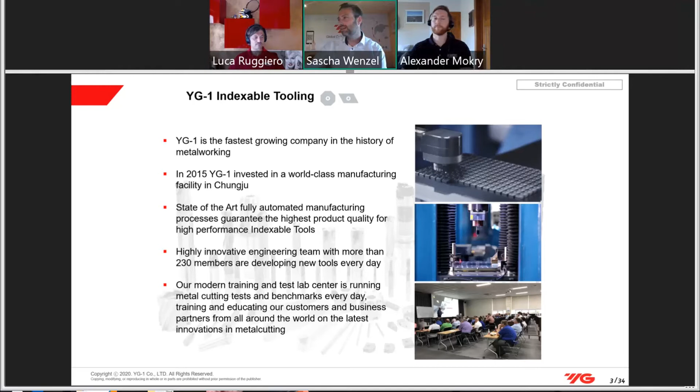YG1 is the fastest growing company in metalworking history, meaning we grow very, very fast every year. A very interesting fact is that we built a world-class manufacturing facility for indexable inserts in 2015, and we have a development team of more than 230 members, plus training labs all over the world, in Germany especially in Oberkochen, and also in Russia, Italy, and other places.

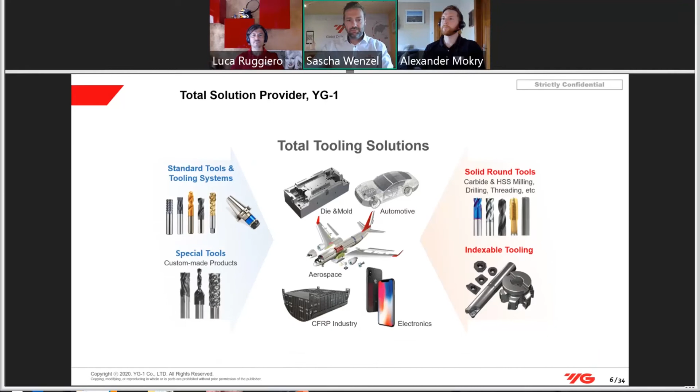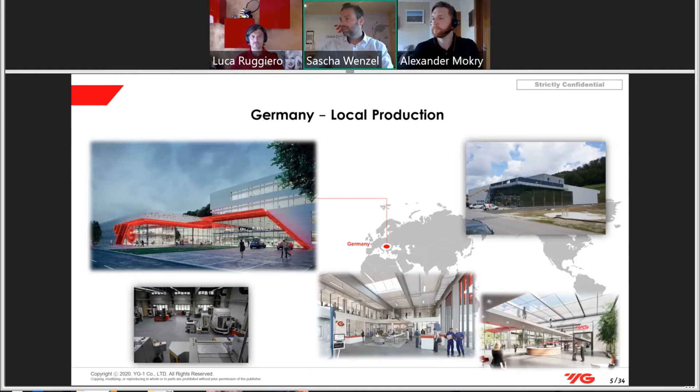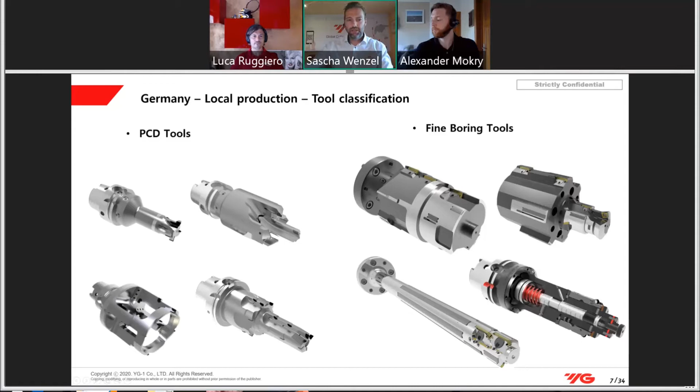The partnership. We have a very, very strong partnership between ESPRIT and YG1. We have a strong history. Both companies are known for innovative and unique solutions on the market. We always provide you the newest technology, and as a team, we are able to give you the whole package and close the gaps between the machine, the tools, and the software.

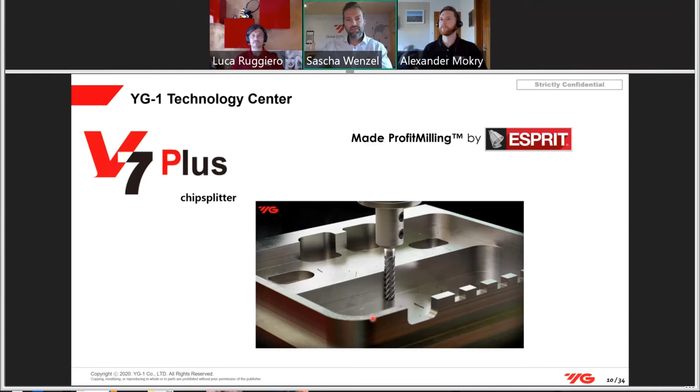Here's a small product overview. It's our V7 chip splitter. It's made even for ProfitMilling. That means trochoidal milling. Here you can see we are working with different materials like titanium, steel, stainless steel, and some cast iron.

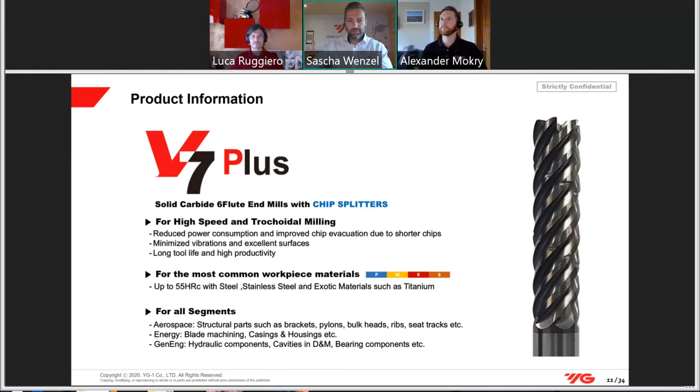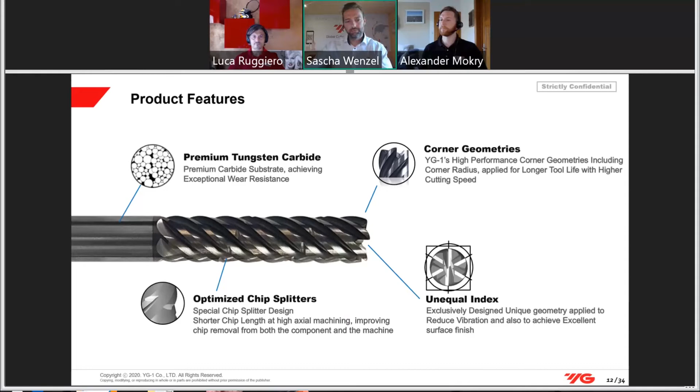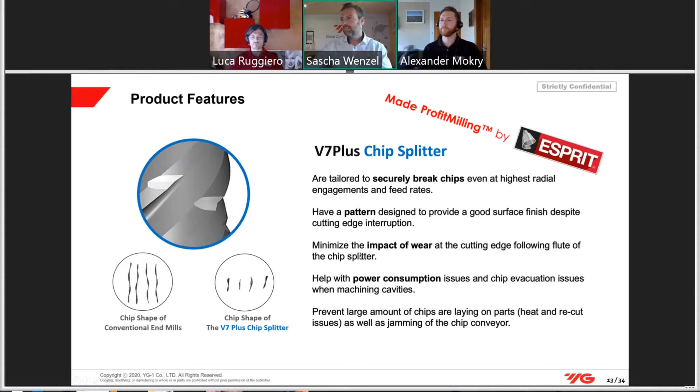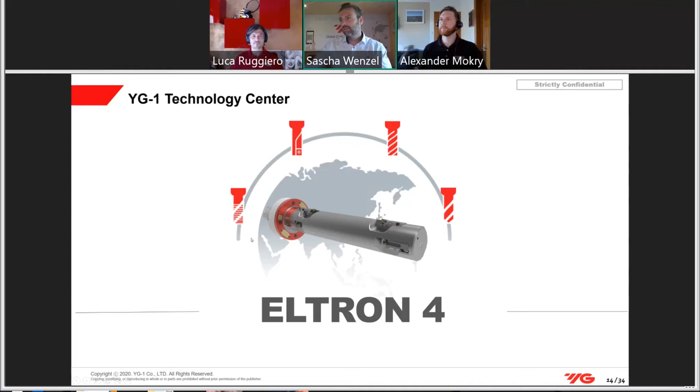I'm now presenting some very, very nice tools. This tool is very unique on the market. It's a totally electronic boring bar, which you can control even via ESPRIT on the laptop, CAM software, or with this small remote control. It's used in the automotive industry; especially we have a project together with BMW.

Here you can see on the right side of this tool, in the red, there are some batteries inside, and everything is controlled via Bluetooth over the software. You can measure in process, and you can adjust this fine boring bar in the process so that you get less scrap and always have the right tolerance for your products.

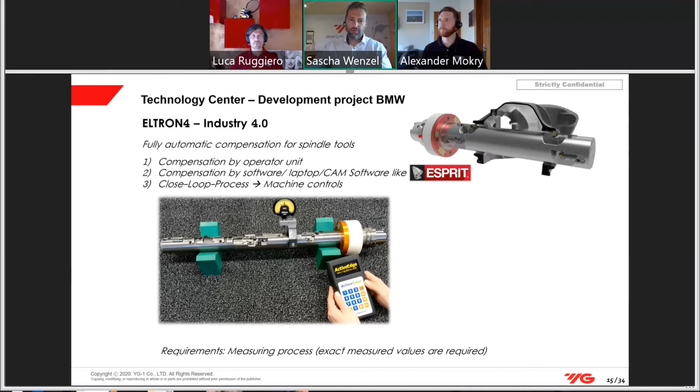How it works: you have a remote control. The remote control gives a signal to this boring bar. Here you can see the cassette, and the cassette is a little electrical engine. The accuracy of this product is 0.001 millimeter. It's very, very fine, and the setting travel is 0.3 millimeters.

And how we come together with ESPRIT: we have an interface where we can go directly from the machine into the process, and you can do this via ESPRIT. That means you make an NC event and program, and then the cassette goes out and does this part, and especially finishes this part.

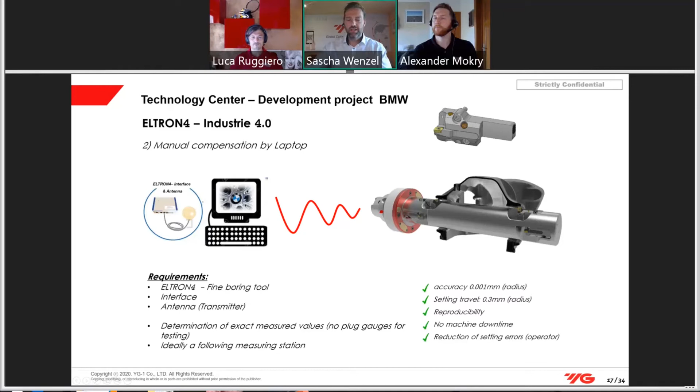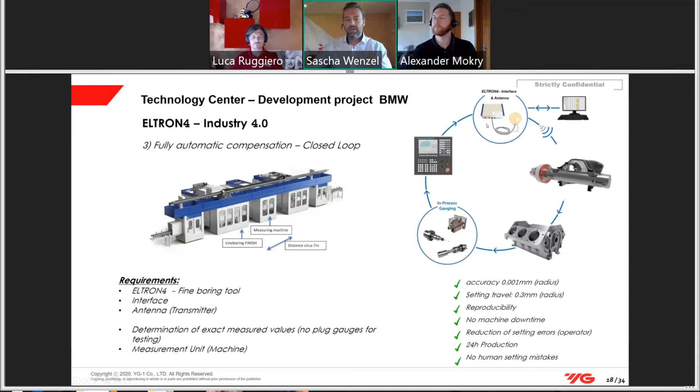The processes look like this. You have a process of machines. You have more machines. You measure your part, and then you give it to the gauging process. You give it to the control, and the control gives it back to the PC, to the process.

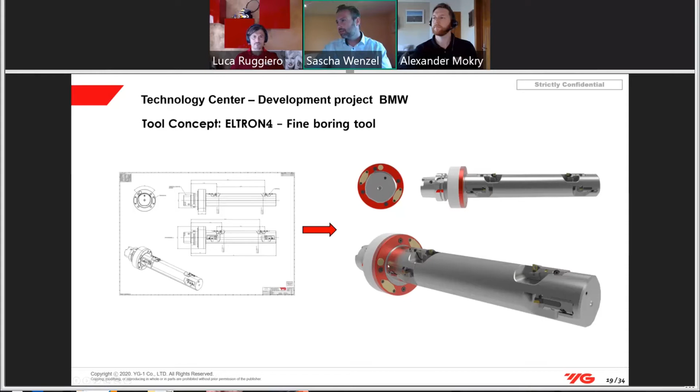Now you can see the small boring bar here. It's in a bigger view. These are our drawings for the customers. Yes. And here you can see the measuring unit with a closed loop directly to the process.

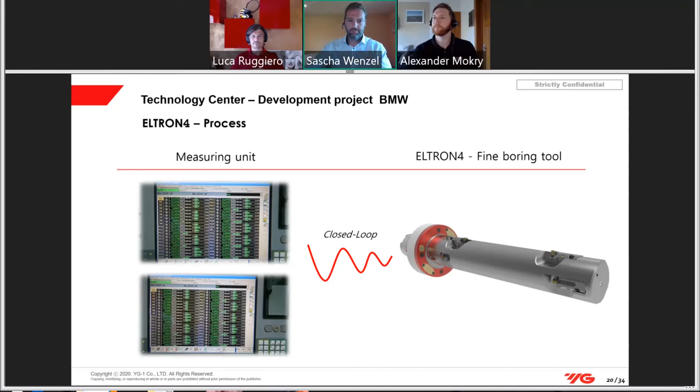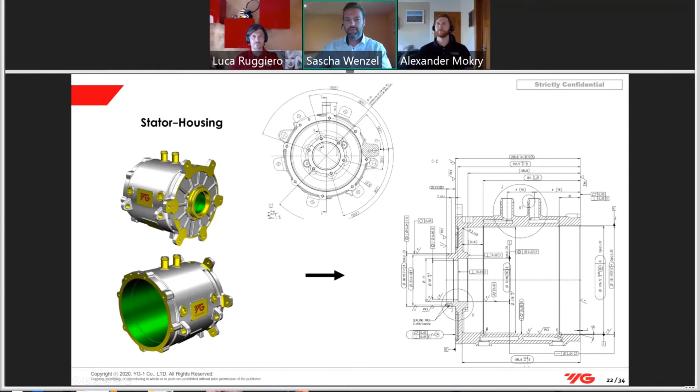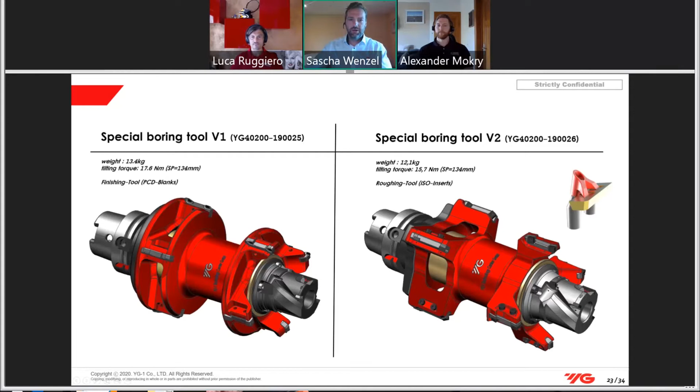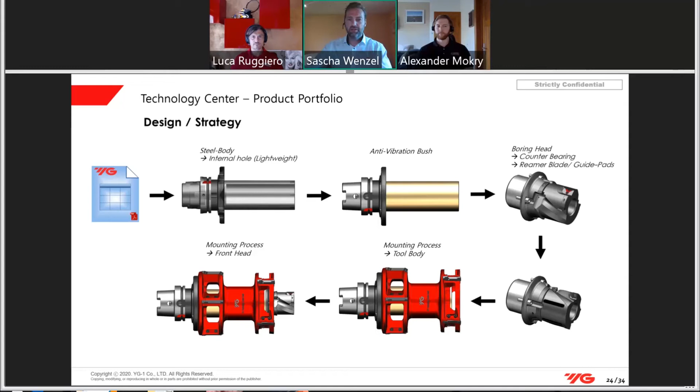These are two applications for roughing, and this tool is modular, and it's made of aluminium and even of steel. And the benefit, why we are so high technology, is that we are using a steel body, and we put an anti-vibration bush on it. That means we have less vibration in the process, because the hole that you have to manufacture is very, very big, and you have to look for your surface quality and for less vibration.

This is a special holding for indexable inserts. It looks like a V, like YG. It's a two-point placed indexable insert. Normally on the market, it's just one holding. We have two holdings with 10 degrees to get more precision for the finishing.

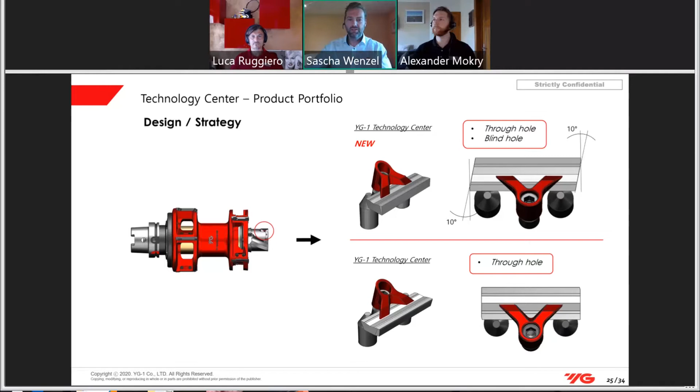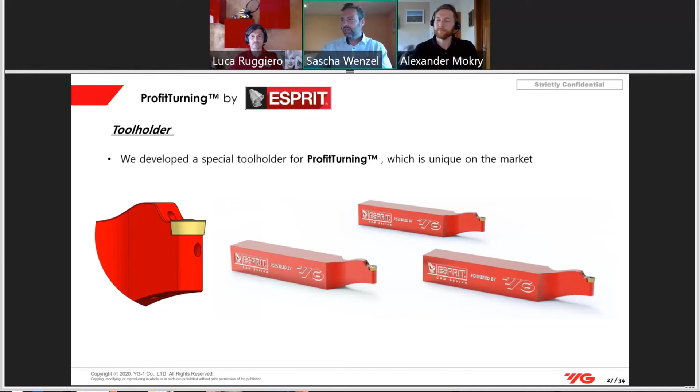Let's talk about profit turning. This is the reason why we're sitting together and working together, strongly together with ESPRIT. Here you can see a small holder program, especially made for profit turning with internal coolant. Sorry, it was too fast. Special made for profit turning. We have internal coolant from the internal and even to the external cutting edges, so that we can provide you a high cutting speed and a high feed rate to get less costs.

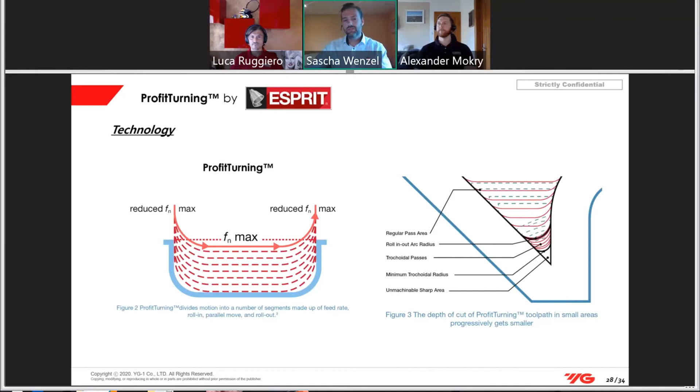Let's talk a little bit about the technology, profit turning. Profit turning is very impressive, because we are always working with radius, with the engagement radius, but Alexander will tell you more. Then you can see on the right side the radius of the trochoidal passes area and the regular passes area. So it's working very, very smooth. You always have a big chip control, which is a big benefit of this profit turning cycle from ESPRIT. And as you can see, the tool life could be 3 times more. You have less cost on your parts and less cost on your tools.

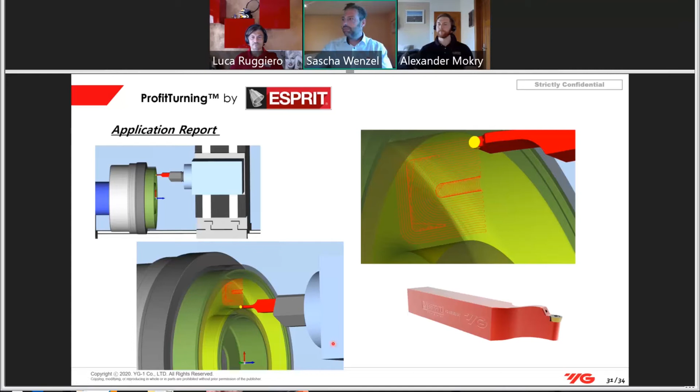Here is an application report. We're working with a cutting data of 400 meters. It could be a brake disc or something else. As you can see here, we have trochoidal passes always here. We have the engagement, which has come inside together with our tool holding.

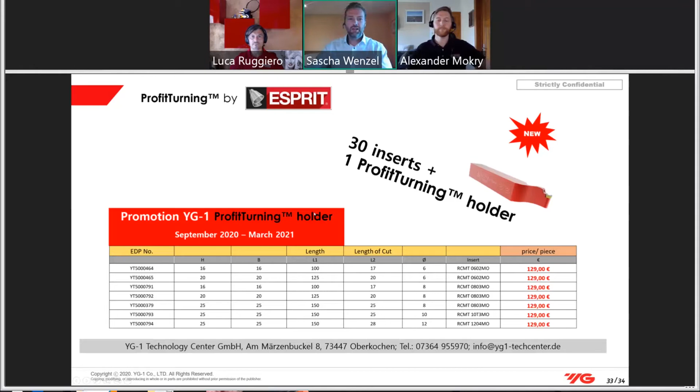Yeah, that was from my side. I will give the word to Alexander, who is showing us the ProfitTurning cycle in ESPRIT. That's right, Sascha. Thank you for your introduction. I'll try to share my screen. Sure. So can you see my correct screen now? Now we can see. Presentation. Yes, we can see it.

Okay, thank you. So Sascha already talked a lot about this new tool, as we can see it here in the picture. It's a new partnership that has come into place with ESPRIT and YG-1. Today we will be looking especially at this tool and how to program it within ESPRIT. What are the benefits for you as our customers, and how are the proper processes for this tool applied within ESPRIT? We call it ProfitTurning cycles. We will have a look at it later. Sascha already mentioned a bit of it, and we will dive a little deeper into the technical part of these kinds of tool paths and strategies.

Okay, the agenda from my side today will be YG-1 and ESPRIT as a first, quick point, and then we will have a look at the technical part. After that, we will swap to a live presentation within the ESPRIT interface, and then a questions and answers round.

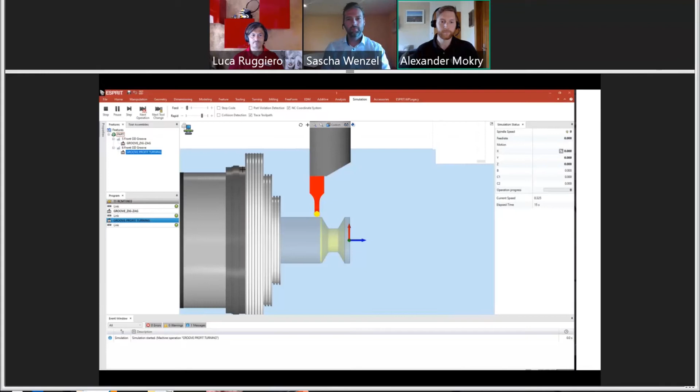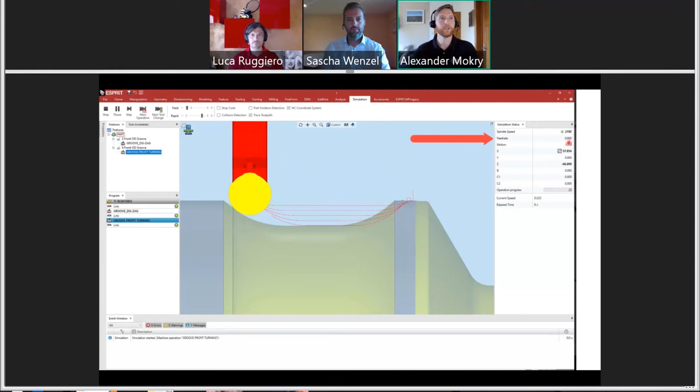Okay, ProfitTurning, a little technical overview. How do the tool paths work, and what benefits do you have by applying them? For this, we watch a short video first. In this video, we will have a closer look at this tool path. You can see it's alternating its directions, but doing it smoothly. And furthermore, it's not only alternating directions, but also changing the feed rate when entering the cut. So wherever the highest load is usually expected, the highest forces, we are reducing the feed rate. The customer can control by what amount it is reduced.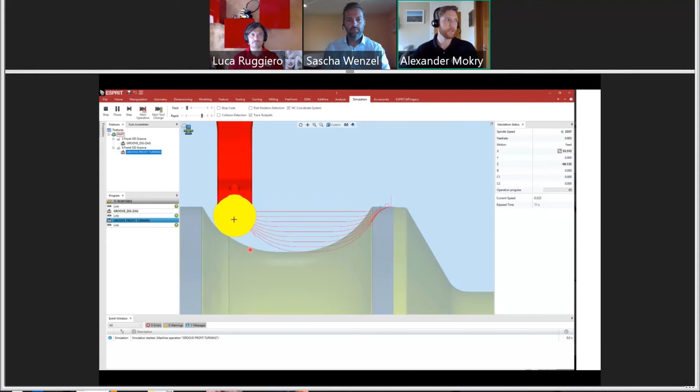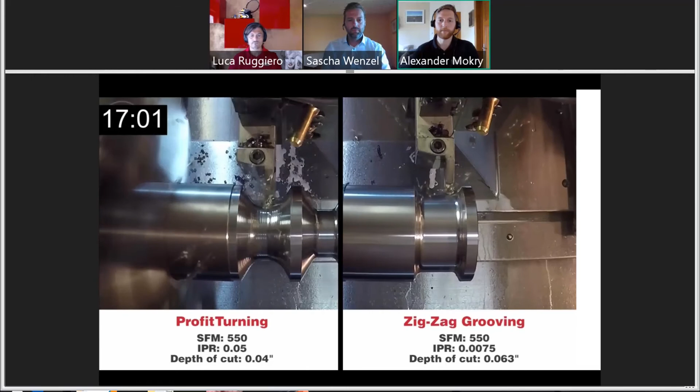This smooth rolling in and out and these reduced forces are what extend the tool life dramatically. There's a lot of mathematics behind these processes. They can be altered to your needs and are very versatile. So this part we just saw in the simulation is now the real cutting situation. On the left side, we see the profit turning compared to a conventional process of zigzag grooving. So it's a massive time reduction and a very efficient process. Very good for the tool life.

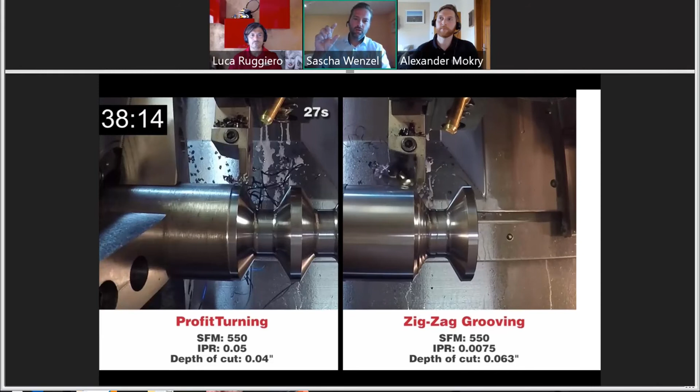And Alex, what you can see is that you always have the chip control, like you say, with a small radius. You can use the whole indexable insert, and because of the chip splitter geometry on this indexable insert, you will always have some chip control. You see on the right side there's less chip control. On the left side, there's always chip control. That means you won't have any problems with spinning chips and so on.

That's absolutely right. Yeah, Sascha, especially on hard material and material that tends to cause problems with chip breaking, these kinds of processes and tools are very, very beneficial. Of course, YG1 offers other tooling as well for other applications where we can use profit turning. We will show this on the next pictures.

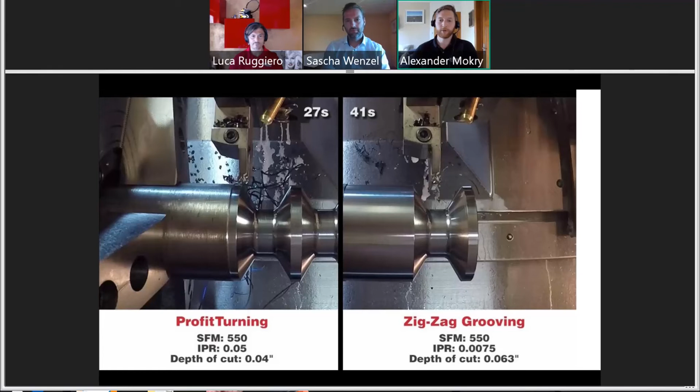So these are some typical applications. High advantages come usually where we have trouble, where the tools tend to vibrate on conventional approaches, where we have, for example, like we see here, these deep grooving passes, where we have tricky to reach areas for machining.

This is being approached with very high feed rates, but small cut depths, so depth of cut. So the forces are dramatically reduced with the smooth rolling in and out. The chips break properly, even in tough areas, and the material removal rate is increased overall. So it's only advantages to use these kind of strategies.

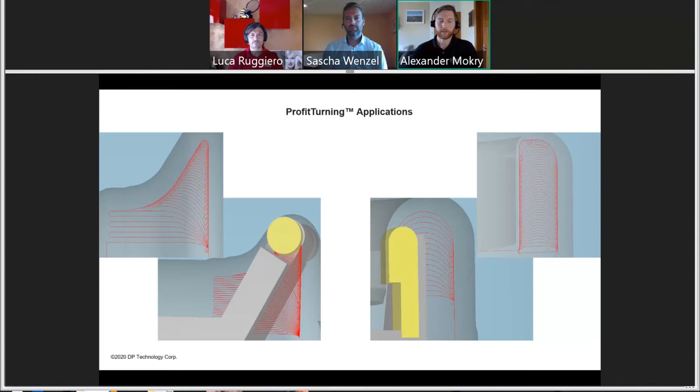Another short video about other applications. For example, of course, you can use it on facing operations. You can use it on face grooving operations as well.

And yeah, next example will be an internal toolpath. There's a bit of, please ignore it on the left side. We will have a look at this later. So this is about the internal application. This is a good example for a tool that is quite long, and it would usually cause problems here. It will vibrate and make troubles machining this part. So these sorts of toolpaths are very good to use. We have a look at it in the simulation as well.

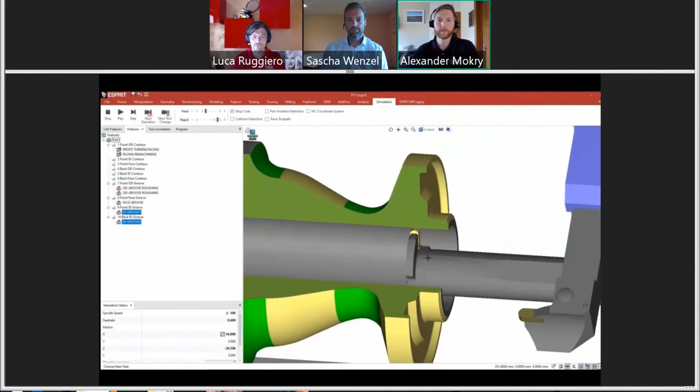So it's keeping the whole process smooth and under control, even though the circumstances are not the best in this situation. Also, I've been talking about alternating cut directions. You are, of course, not forced to do it. In this case, we are just pulling out for the chip evacuation.

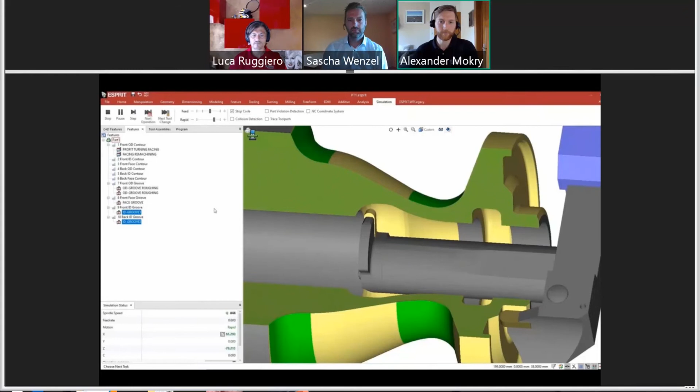As a rule of thumb, the feeds and speeds, you can increase them. You can increase the cutting speed by 2.5 times, and you can increase the feed rate 3 times over what you would use on a conventional approach.

Okay, let's swap to the live presentation. We will have a look at ProfiTurning processes in ESPRIT and how they are applied with this tool and the settings that we have inside the process. I will now swap to the ESPRIT interface. So I hope everyone can see this now. Is it correct? Yeah. All right.

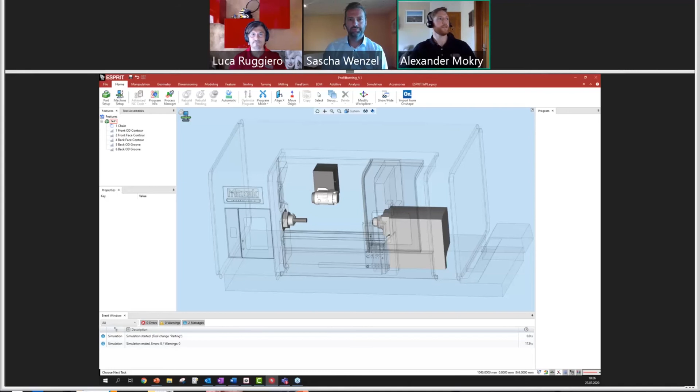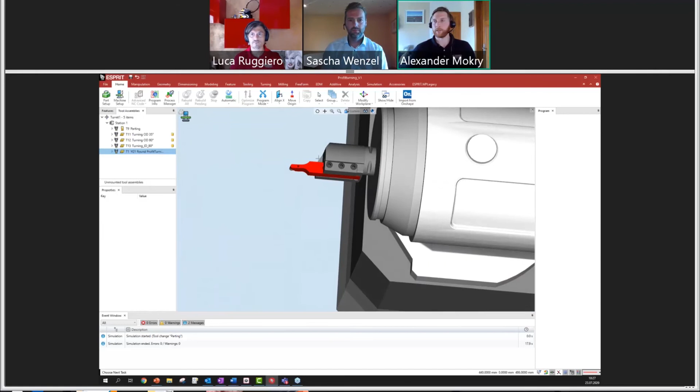So what we find here is a prepared CAM workspace. That's how you would work with it usually. It's a template. We have a machine already loaded, we have our workpiece already loaded, and we have some of the tooling prepared. The YG1 tool is loaded here and ready for us to use. What we will do now is have a look at this part. This is just a sample part to apply some of the strategies. We will only focus on this YG1 tool now and the roughing processes that are involved.

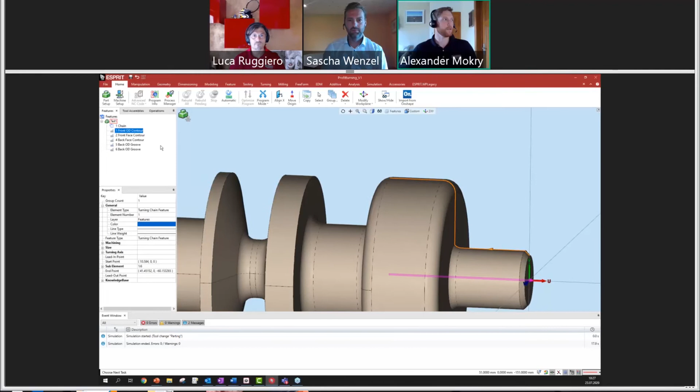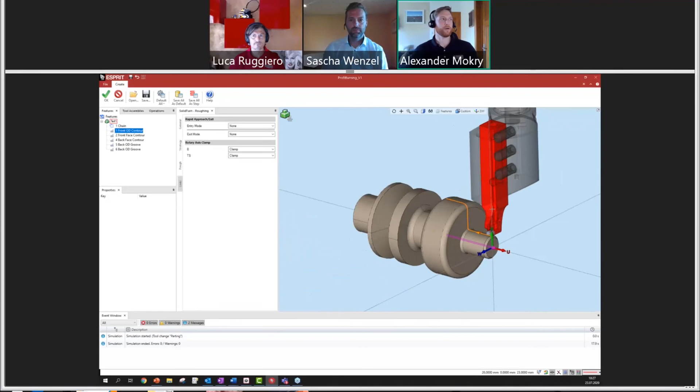So highlighted in orange are the areas to be machined as I select them. And we will now apply a process on these areas. This is quite easy to be done. You only select your machining area and then your appropriate process, as we already suggest the correct tool. The cutting speed is very high. It's 400 in this example.

It's for 4140 steel, but Sascha and YG1 do provide a spreadsheet for these kinds of cutting data for this tool. So this is an example, 4140 steel. We are running 0.7 per revolution. For strategy, we of course apply ProfiTurning. We have all the necessary settings here, like the step over, the cutting depth. We have the roll in and roll out radius.

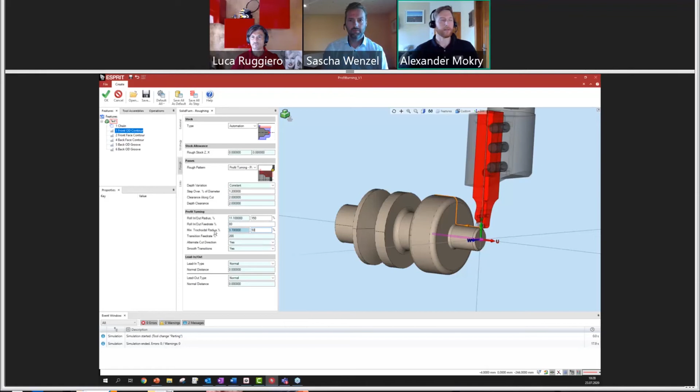We can control how the cut will be entered. We can control the roll in, roll out feed rate. We reduce it to 80% in this example. And we can also define the minimal radius that is allowed to be generated in this toolpath. So with only one click, we have done this whole toolpath here. Let's have a look at the simulation.

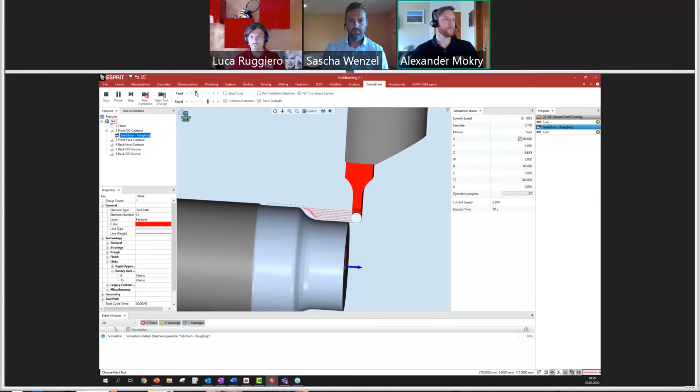And here, again, you can see it. It's a very smooth process, and we are constantly producing chips here. We are always in the cut. The load is the same on the left side of the blade as on the right side. So it's a smooth way to wear this tool. It will last much longer and be much more efficient to get the material removed this way.

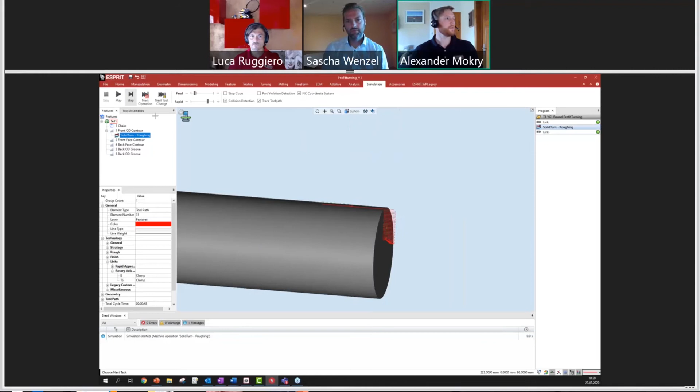If you would like to use it, especially, I see this always from the market, when you have low power machines, because they have not so much torque. You can't work with CNMG or DNMG with 6 millimeters. It's a very nice application to work on less powerful machines, on smaller turning machines, to generate a lot of chip and removal rate. So exactly.

This application is excellent for this kind of machine when you have smaller machines but you have to take a lot of chips, material, out of it. That's right. The whole idea behind this process is to reduce the forces and to make sure that the cutting forces are low. So it lends itself to, as you just said, those kinds of machines. It's very, very beneficial to use this. Yes, that's right.

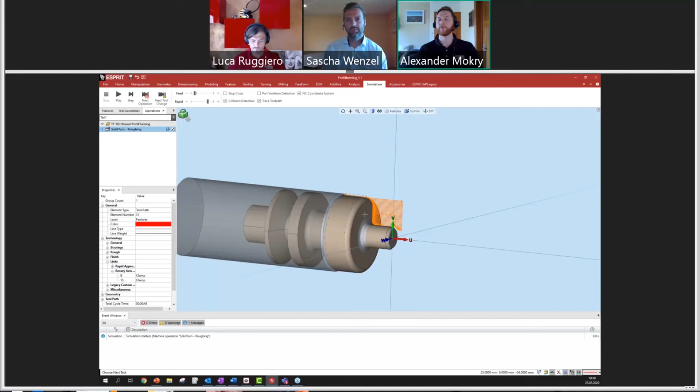So I would like to show how to apply this process. We already programmed this here on the right side. All you need to do is drag and drop it onto your next chain as you wish to machine it. So you don't have to worry about filling in this whole mask again. Just drag and drop it, it's 2 clicks and the process is ready to go again. And we are machining here. Same settings as before.

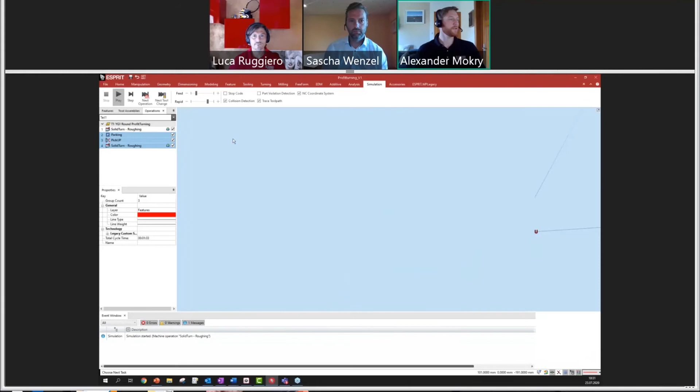Okay, some alterations on this program. I would like to support it here on this side with the sub spindle. This is very easy to be done as well. Just insert location and we park the tool and we pick up. I will do this a bit fast now, but we will have a look at it together quickly in the simulation. So what I have changed now is just that we grab the part.

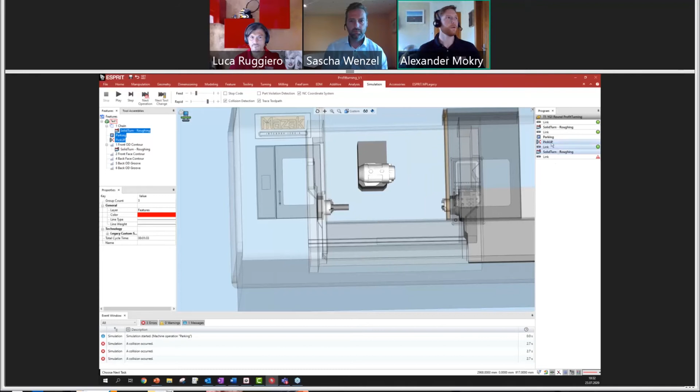We have a collision here, so there's a mistake. This is why we have this digital twin, so that we see these sorts of things happening before they happen on the machine. So this is a little mistake. I was playing with this program before the presentation, so I think it only has to be set to 0 here, and then it will work again. So it will work. Perfect. And machine this part.

Okay, let's have a look at these grooves. We see we have 2 grooves here. One that is a bit easier to machine, allows us a better chip removal, and one that is a bit harder. It has a steep wall and it's getting smaller here. We will have a look at this easy groove first. Same as before, just select it, and we go into the turning features here and select the grooving operation.

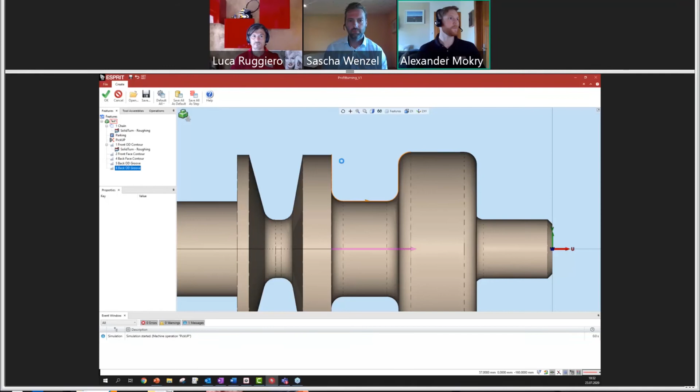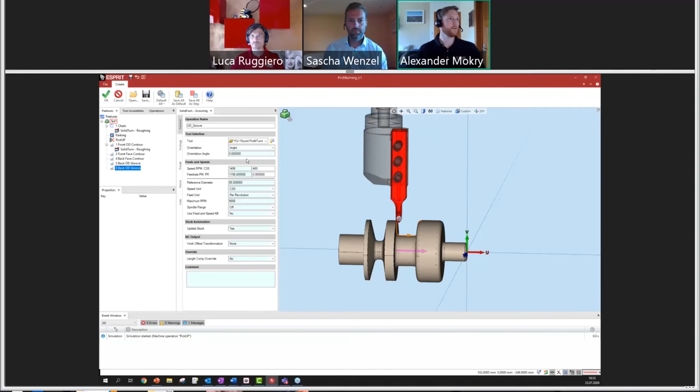We have, of course, options. Imagine, for example, we have the chuck grabbing here. So we can just swap this tool. ESPRIT will then automatically calculate the spindle direction to match the new situation. So it's easily swapped, so we have enough clearance here. The strategies are the same as we used before.

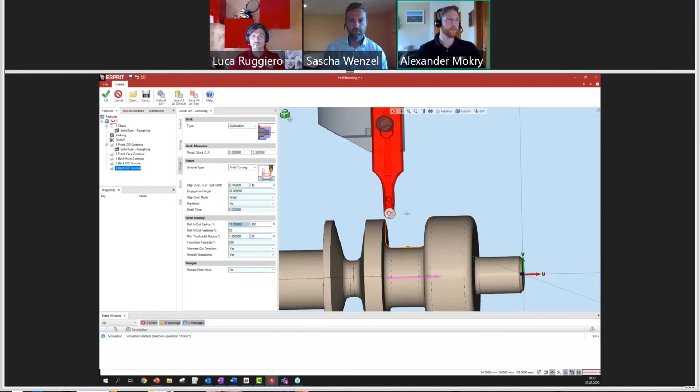For the OD roughing, we have a step over that we can define, a cutting depth. We have the roll in, roll out radius, the feed rate to be reduced by rolling in, and the minimal radius that is allowed to be calculated in this pass. And it's a click, and we have done it. And the second groove, we can just drag and drop it as well. We've done it here as well.

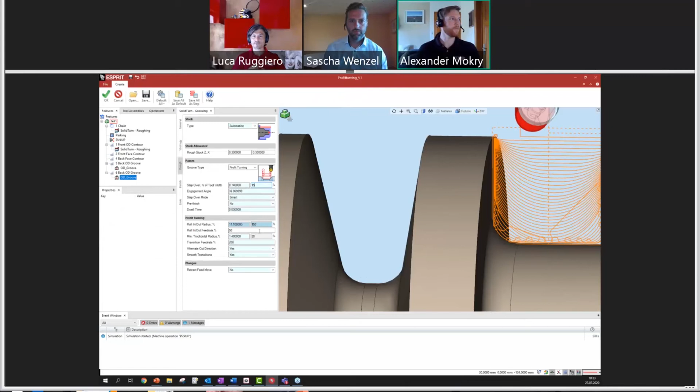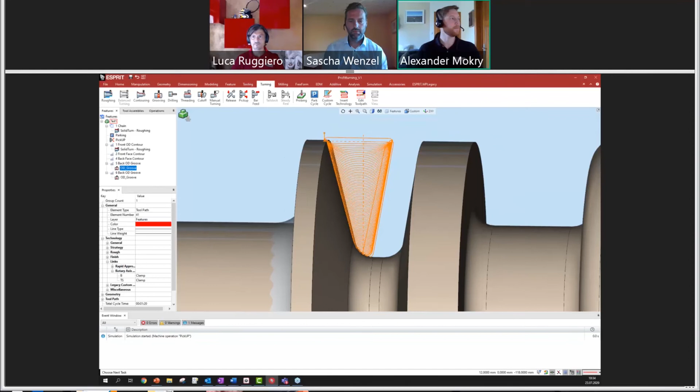So we think we can do this one a bit tougher. And 0.8. So this is the first groove, and we have a look at the other one. We do this a bit smoother with only 8% engagement, but therefore we increase the feed rate to compensate this and still have the long tool life and all the other advantages. So you see, smooth rolling in, smooth rolling out.

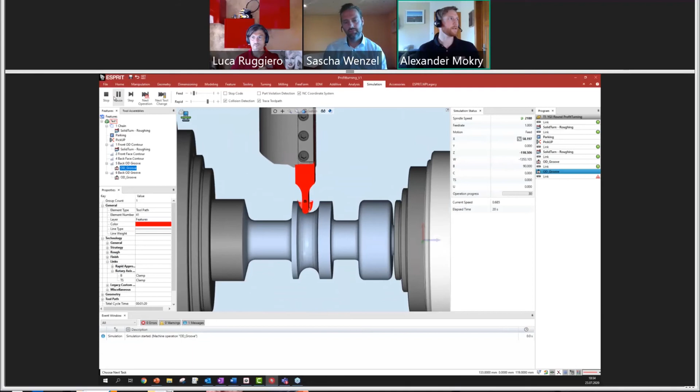No matter what you machine, if you are roughing on the OD, if you're doing a groove, if you're doing a facing operation or internal, it's always the same process, always the same tool path and the same mask that you just saw. I'll just go back and show you the mask again. So it's always the same mask and the same settings, no matter where you are machining. So it's quite easy to understand and to apply.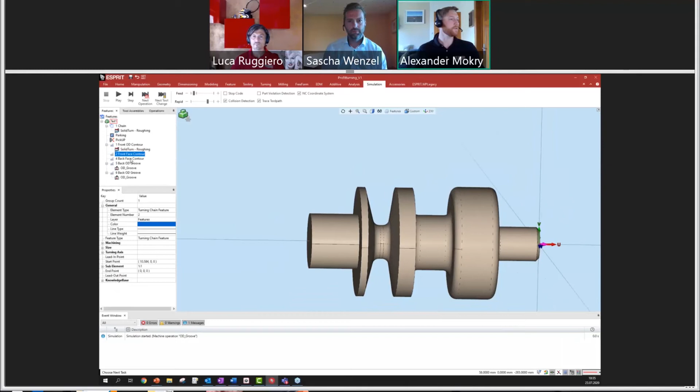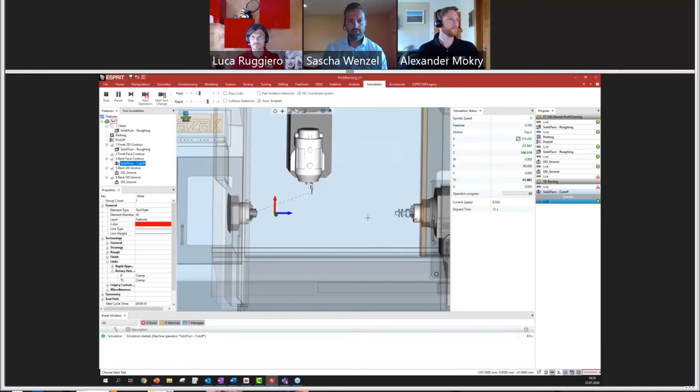Okay, let's do the parting as the last step. We have now been roughing this whole part, and we are doing the parting operation. Also very easy, we just select the cutoff, and we are parting. Okay. Perfect.

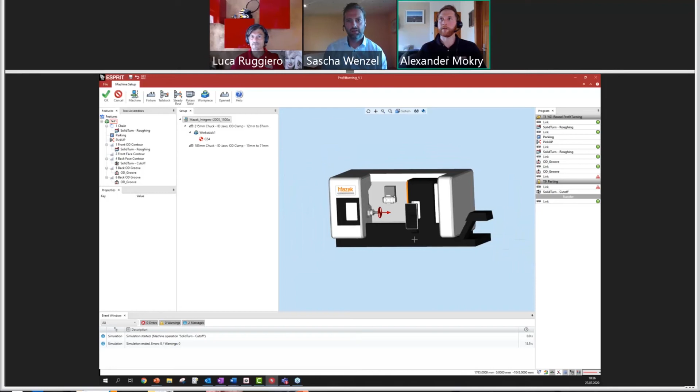I have one question regarding the machine. What happens if we don't have a Mazak? Maybe we have a different machine, or how long does it take to put all the processes together to change the machine? I think I will just show it on an example. Yes, that's right. We have a Mazak here, and everything is loaded here, and we have programmed something. And maybe it can be the case that a machine breaks down and you need to go to another one. If the customer, for example, has another machine, DMG Mori for example, then we are able to swap this quite easily. Okay. Let's have a quick look at the NC code for this machine.

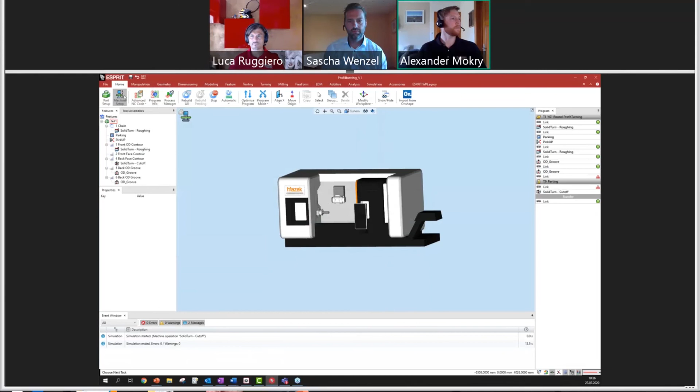So we have a Mazak G code. Everyone can see it, I think, for this program. And we are swapping this machine now to this DMG Mori. Got the same kinematic, but of course some other travel limits and so on within this machine. So I'm loading this machine. You see we are still in the same ESPRIT document. We just swapped the machine.

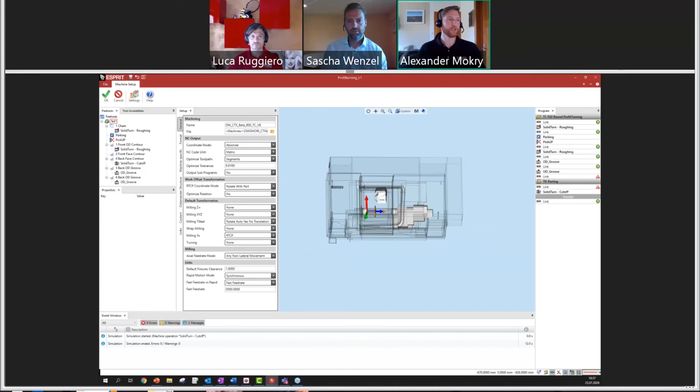And what makes this possible is the machine intelligence that is behind every machine package that is coming with ESPRIT. So we are talking about digital machine packages here. It allows us to swap machines because this intelligence behind it always calculates everything new. So as soon as you swap the machine and you hit the OK button, the whole program will adapt to the new situation. You see, we just swapped the machine. We have a completely new program.

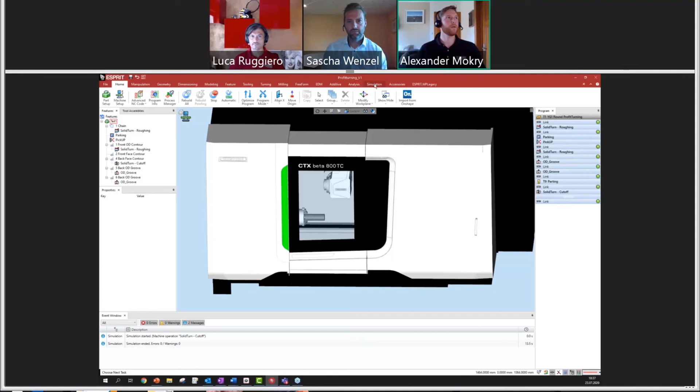And what we just saw before, we will see the exactly same simulation again, only on another machine with another G code and another kinematic. But this makes it quite versatile. In reality, you would just swap your tool to the other machine. You set your zero new, and then you are ready to go with the new machine as well.

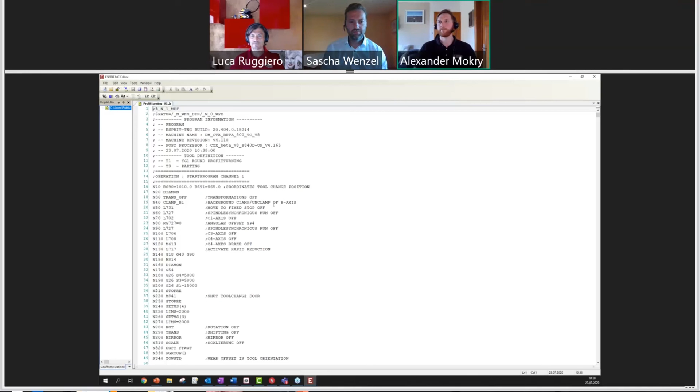Let's have a look at this in G code. It will be another one now. In this case, a Siemens for DMG Mori. You change between different controls. I think it was less than 3 seconds, yeah? Yeah, you just select the machine, change it, verify the simulation again, check the digital twin. We saw a little collision in the beginning, those sorts of things, and then you're ready to post the new code and go on your other machine. Perfect. Very fast.

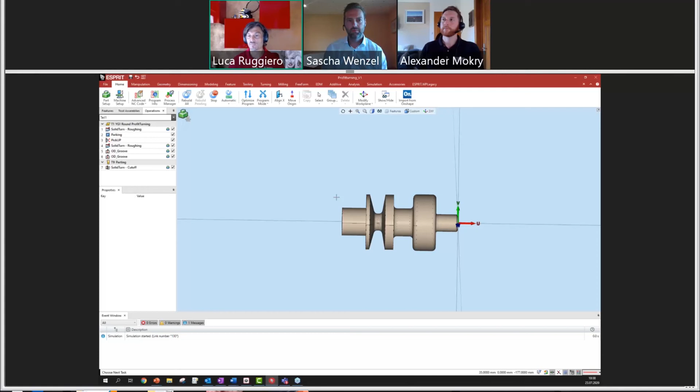Yeah, I just want to underline that both for Mazak and DMG Mori, we have a strong partnership together, like with YG1. So we're developing the post-processor directly with them. It means that the post-processors we are giving to the market are certified directly by the machine tool builder. So the quality of the G code is really nice.

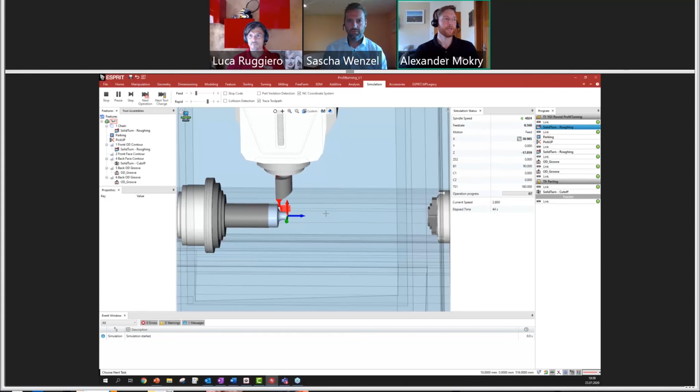Yeah, and I think this is the very important thing to understand. It's not only the CAM software, it's not only the tool, not only the machine, it's always the combination. It has to be perfect to get the perfect results. And that's why we have these kinds of partnerships. And also this presentation today is focusing on these profit turning processes and to make you, the customers, aware they exist. They are here to help you get things done faster and more efficiently in the future.